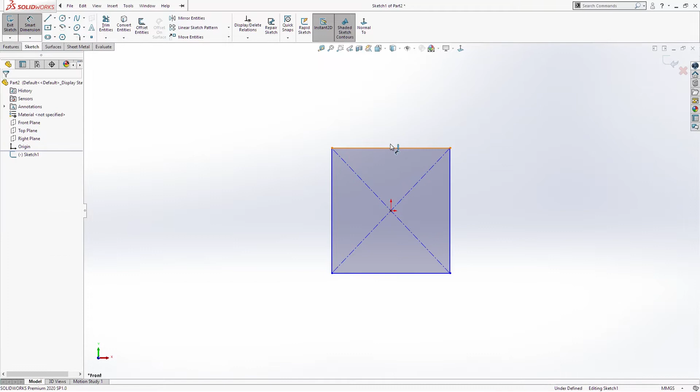Start to sketch on front plane. We will draw one center rectangle. We'll add a few dimensions. We'll go in extrude boss base, 5 millimeters, and we'll click OK.

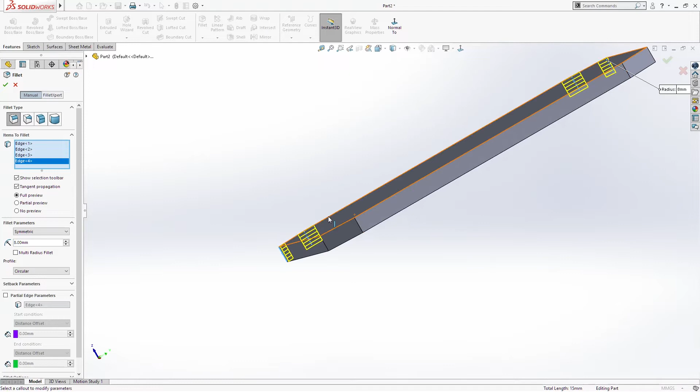Next thing that we are going to do is add some chamfer, 10 millimeters, 45-degree. We'll click OK, and fillet radius 8 millimeter. And click OK.

We'll go in chamfer one more time, 2 millimeters. Okay.

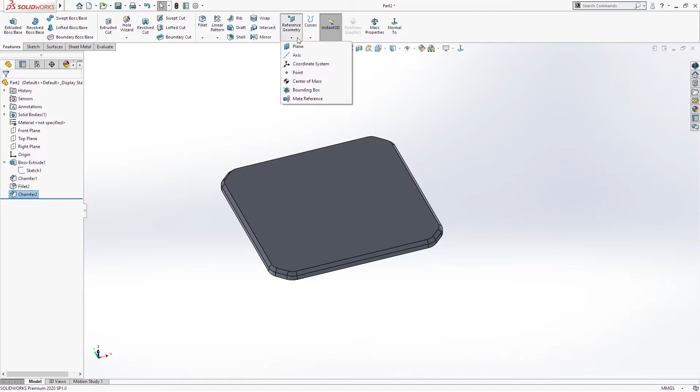Now we are going in reference geometry plane. First geometry will be right plane, and we'll add one dimension, 37 millimeters between these two planes. Click OK.

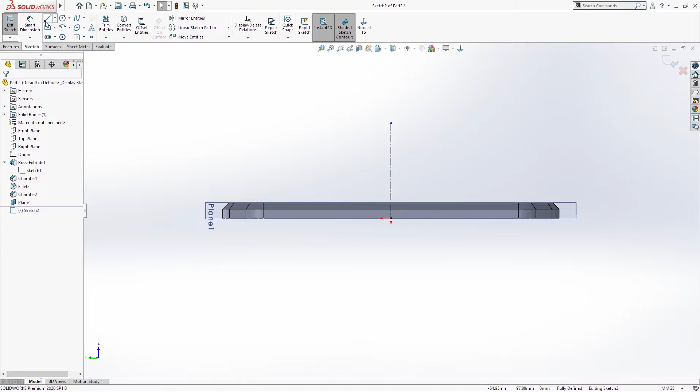Sketch on this plane. We'll create one center line. Then we need a few lines here. Add relation between this point and this line here, coincident, and also these two coincident. We can hide this plane now.

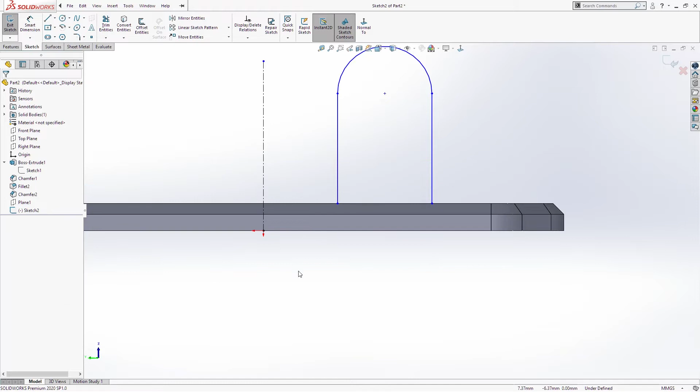We can hide this plane now. We'll continue to sketch. We need one circle now.

This will be 14 millimeters. Here we need 16 radius. We'll create one center line. From here to here we need 30. Then from here to here we need 52.

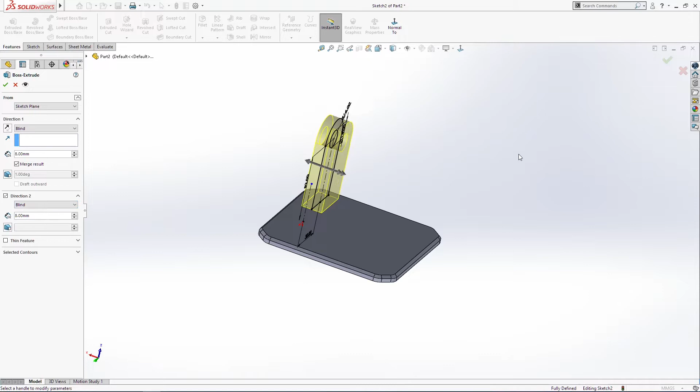We'll finish this open contour, and we'll create one extrude boss, two directions, 8 millimeters. Click OK. Now we'll add fillet, 2 millimeters, and click OK.

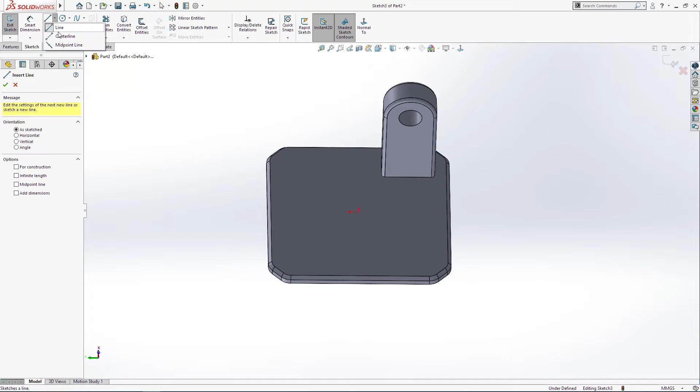Next thing that we need to create is two planes, but we will need first a few reference points. The second will be on this surface here. So create one center line again.

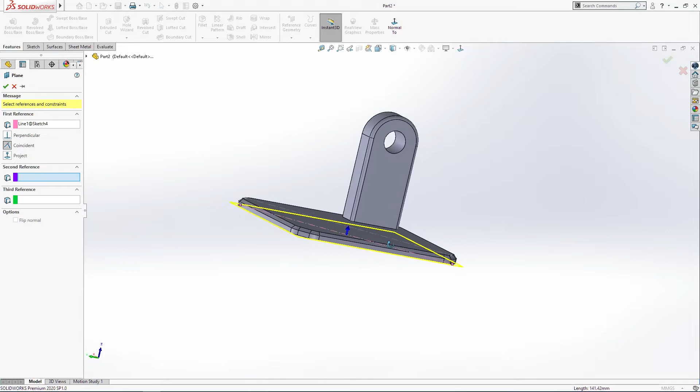Exit. Go in reference geometry, plane. Click this line here and this point here, and click OK. Hide these two.

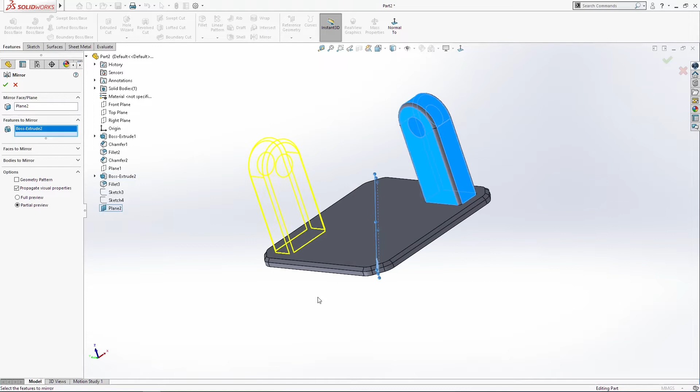Now we're going to use the mirror command. We'll select plane 2 and boss-extrude 2. Click OK. Also don't forget chamfer - in my case fillet. And click OK. Hide this plane.

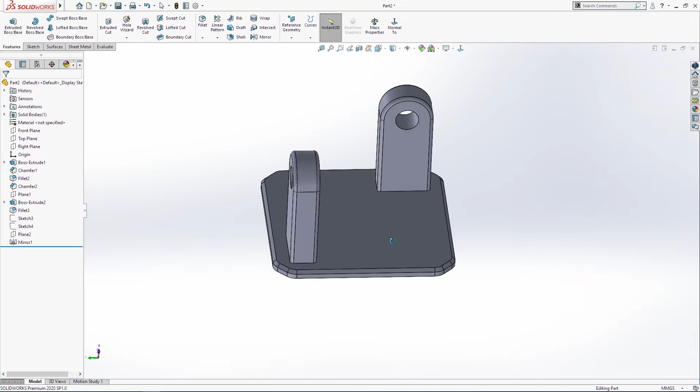Save the document, and we are going to continue to sketch our next part. The next part that we are going to sketch is connectors for the middle part, and we are going to start to sketch on the front plane.

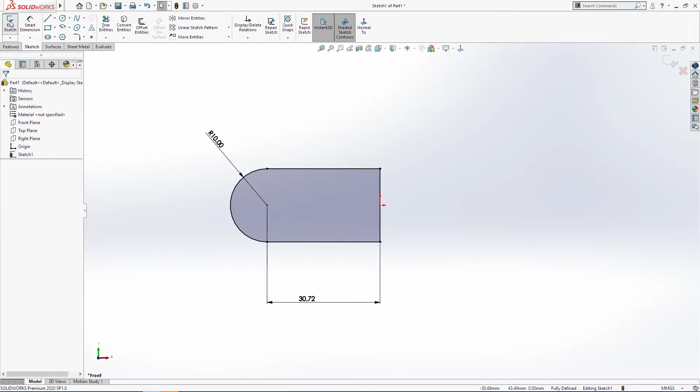Create a few lines first. Make this line and origin point midpoint, 10 millimeter, and from here to here we need 30.72 millimeters. This will be 7 diameter.

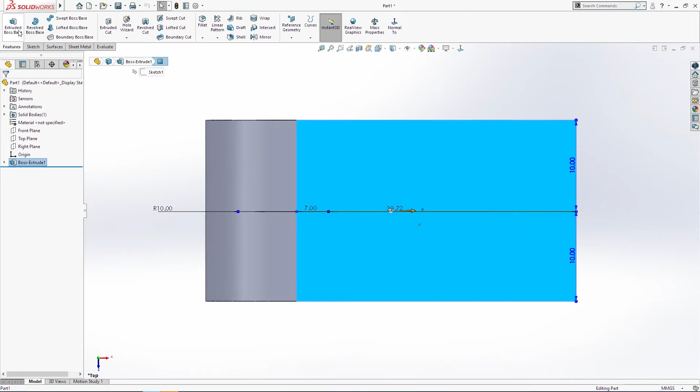Extruded boss base, two directions, 10 millimeter, and click OK. Now we are going to sketch on this face here. Create one rectangle. We need one center line.

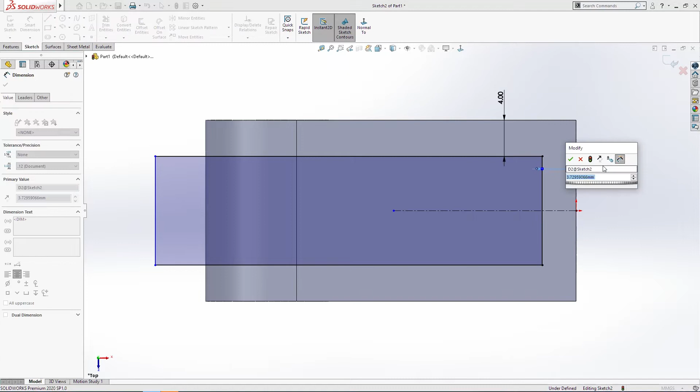Make this three lines symmetric. Add a few dimensions, 4, 4. Extrude cut, through all, and OK.

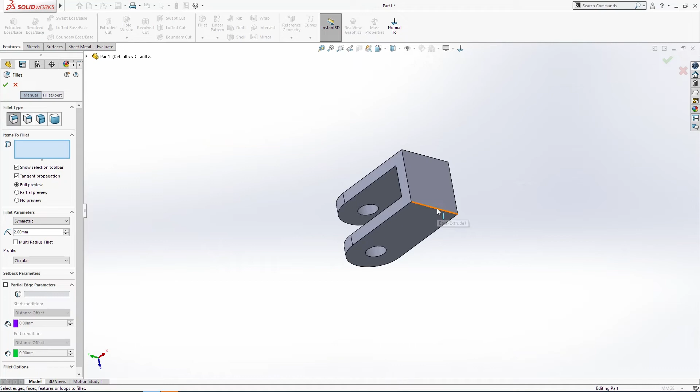Now we are going to add some fillets, 2 millimeters, for these two edges. One more time, 1 millimeter, for the other edges, or 0.5. Click OK.

Edit this fillet and add this edge here and this edge here. Click OK.

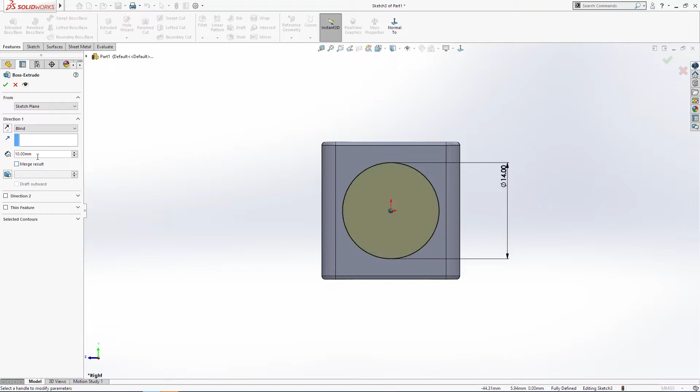Now we are going to sketch on this face here. Create one circle. It will be 14 diameter. Extrude boss, 20. Click OK.

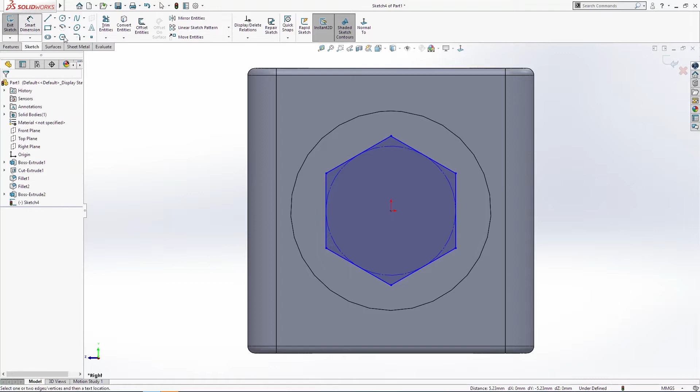One more time, sketch here. Make one polygon. These two have to be vertical. 5. Extrude boss, 15 millimeters. Click OK.

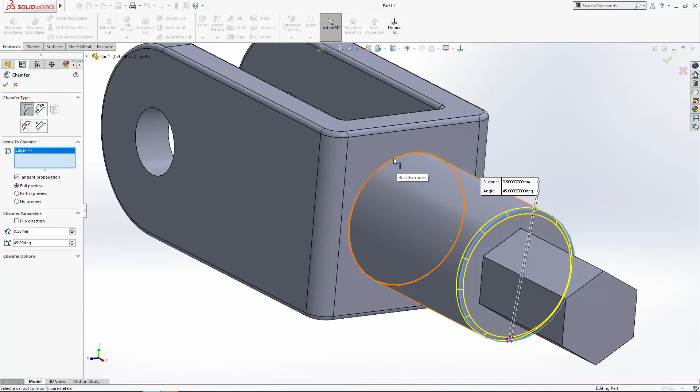Chamfer, 0.5, this edge here and this edge here. Click OK.

So the next part that we are going to sketch is our third part for this video. So create new part. We are going to sketch on front plane.

If you see, I changed the commands that I am usually using, but it will be easy for you to find them on the normal menu. So this is the best way for me because I'm using shortcuts and other things.

Start new sketch on front plane. Sketch two center lines. Make these two coincident, and also this line for construction.

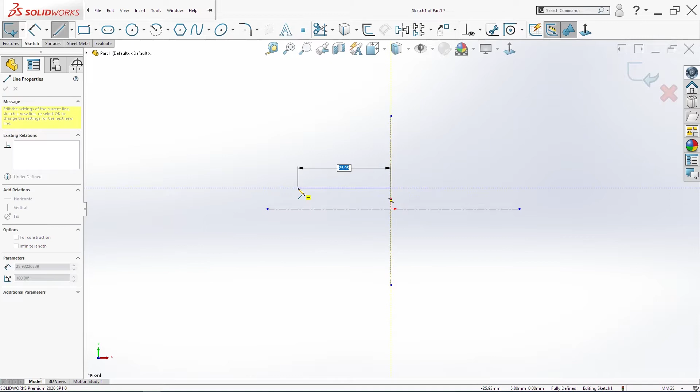We'll add a few more lines and arcs. So now we need one arc, one more arc. Make this to midpoint, this to concentric. Here we miss tangent, and add a few dimensions.

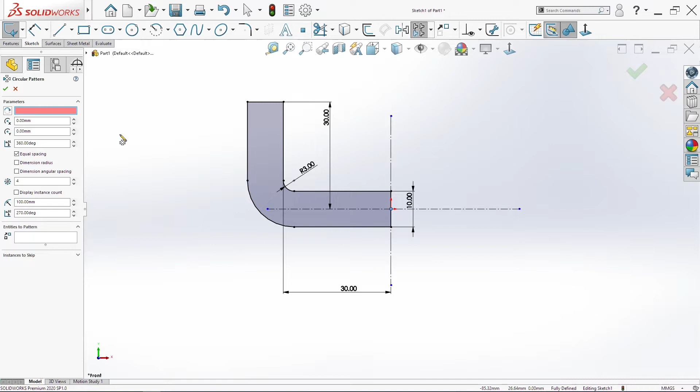Also from here to here, 30. We will use now circular sketch pattern. We select this point for reverse direction, and we will select the other lines that we need for this circular pattern.

We don't need this line here. We'll make 2, click OK. I will add a few more dimensions, and I will use trim for this here and exit the sketch.

Now I'm going to use feature boss base, select this sketch region, two direction, 10 millimeters, click OK.

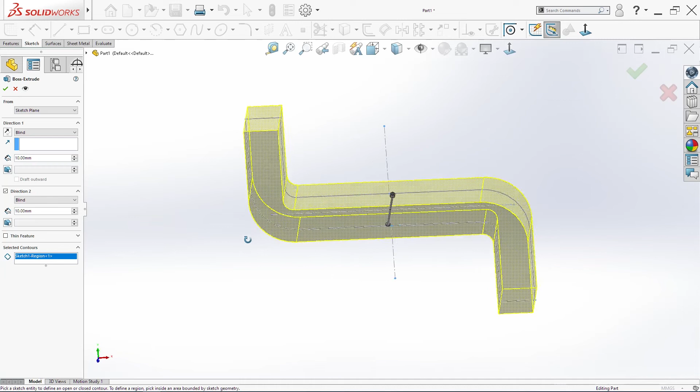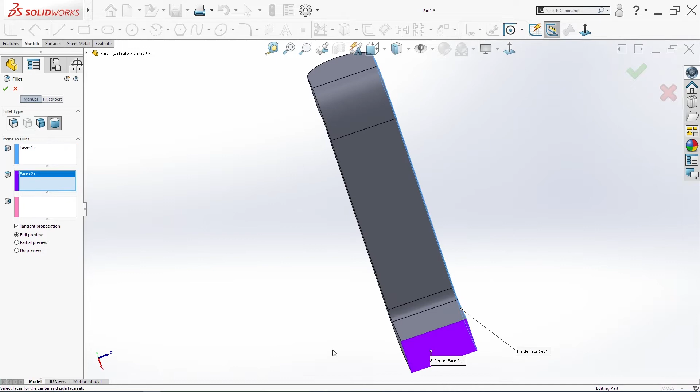Next thing that we are going to do is to add some fillets. Use full round fillet. Select this surface, and this surface. Make the same thing for the other side. This surface, this surface, this surface.

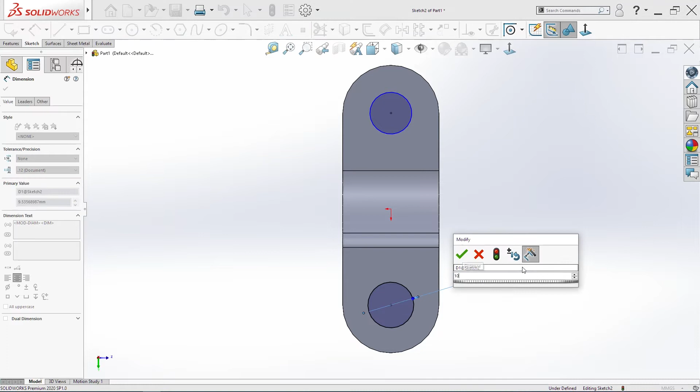Start to sketch on this surface here. We'll make 2 circles, the second one will be here. Add 1 dimension, 10 millimeters, and these 2 has to be equal. I'm going to extrude cut through all. Click OK.

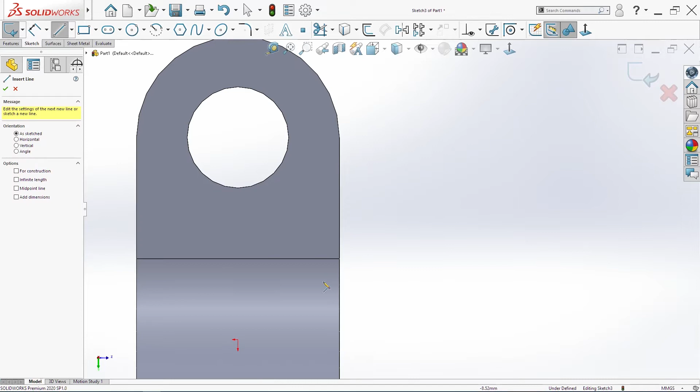Now we have to sketch on this surface here. So again, line, arc, one more time arc, and we need 1 center line, again 1 more line. Make these 2 coincident. Use trim for this here and add a few dimensions.

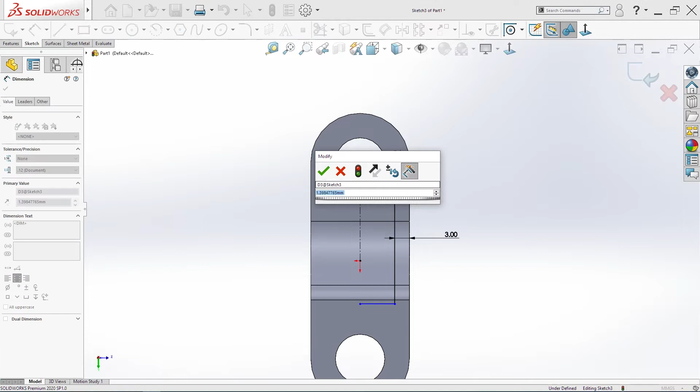So from here to here, 3 millimeters. Make this circle and this here concentric and add 1 dimension here, 1 radius, and from here to here we need 3 millimeters. This will stay blue, and select this 3 and go in mirror. Now go in extrude cut, write 7 millimeters and just click OK.

Again, now sketch on this surface here. We'll use a few lines. Make these 2 collinear, and we need just 1 more dimension from here to here, 3.5, and we will use extrude cut command, and we will make it up to surface. Select this surface here and click OK.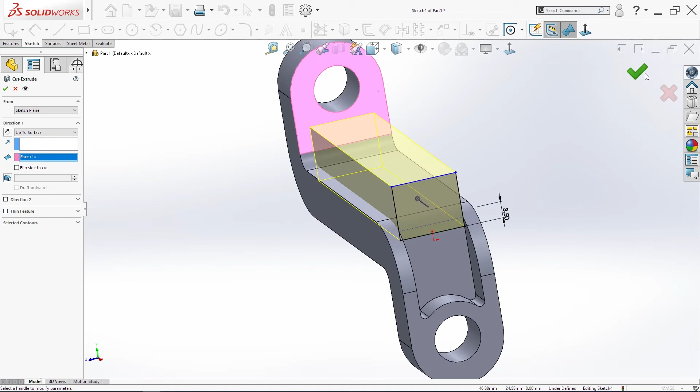That's the one side. So we can measure here 3.5, and here we need 7.

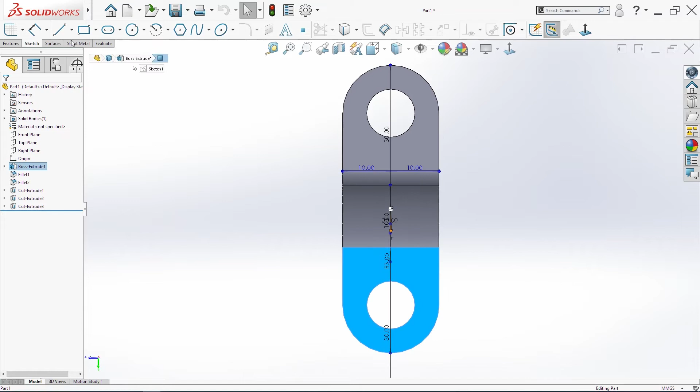Now we'll sketch on this surface here. And also the same things that we just did. 1 center line, make it for construction, line for, so from here to here to here. Now 1 radius, smaller radius, then 1 bigger, and we'll make these 2 concentric, this point and this line here coincident.

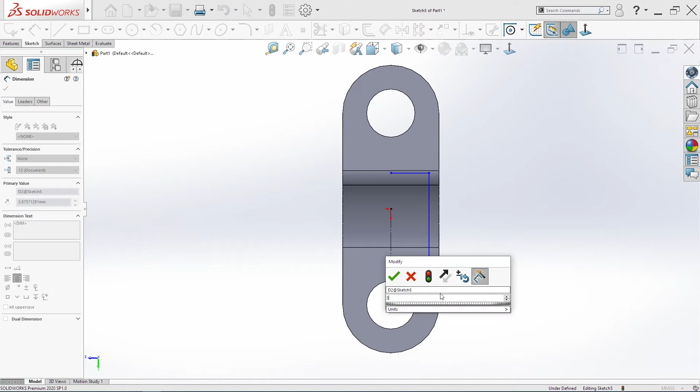We'll add a few dimensions, R1, 3 millimeters. I don't need that, so from here to here 3 millimeters, and these 2 coincident, and drag this a little bit, select everything and go in mirror. Extrude cut 7 millimeters, click OK.

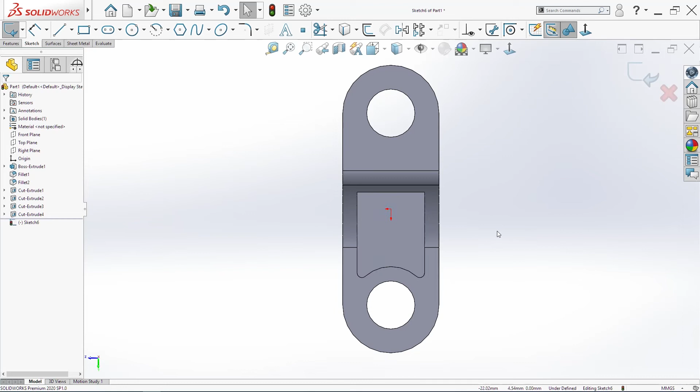Sketch on this surface here. Again, make one rectangle. Make these two collinear, add one dimension from here to here, 3.5 millimeters. Extrude cut, go up to surface, select this surface here, this face, and click OK.

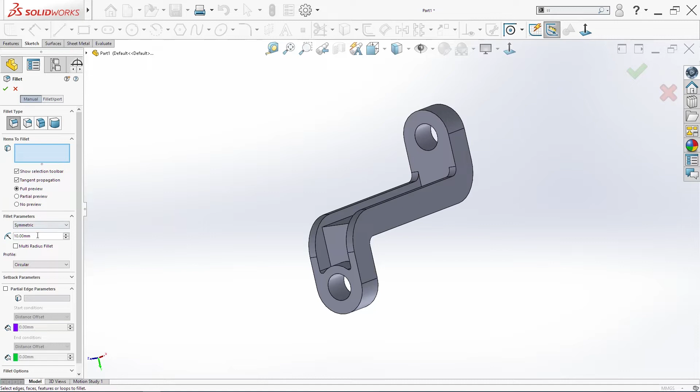Now we'll use command fillet, we're going to constant size fillet. We need 6 millimeters. We'll select this here edge and this here edge and click OK.

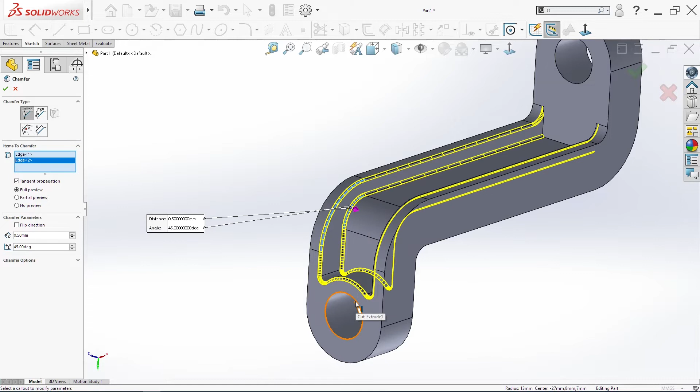We need chamfer now, 0.5 millimeters, and select this here, this here, this here, these edges here, also the circle, second side, and circle, and just click OK.

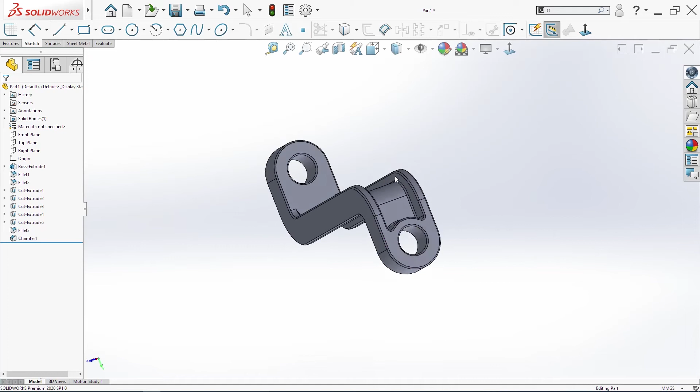Save the document, and we are going to sketch the next part. Create new part. So we will sketch the third part now on front plane.

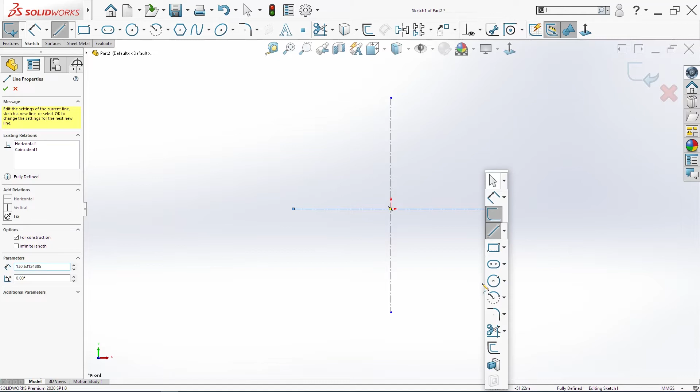I'm calling this command by clicking S on my keyboard. I will start to sketch two center lines, lines for construction, 1 and second. Now I need a few lines.

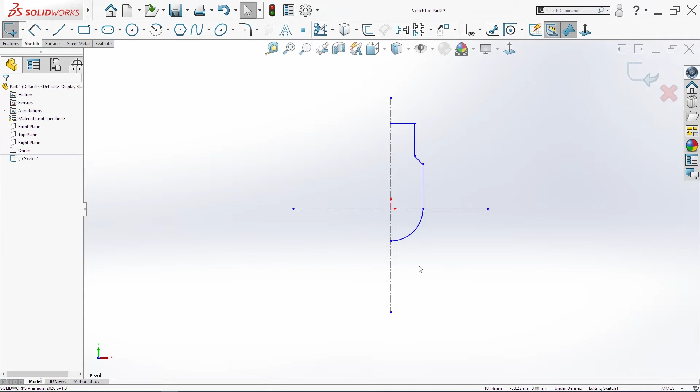Add these 2 points coincident. Add a few dimensions. 7. Here we need 45. And here we need 28. And here we need 12.

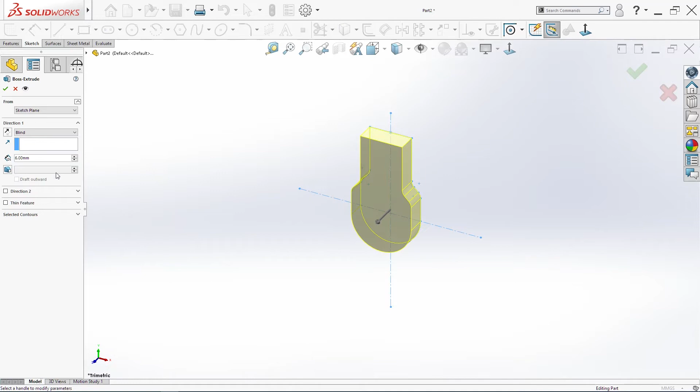I will add some fillets, 2.5 here and here, click OK. Select this all and go in mirror. Exit the sketch, go in feature boss base, two direction, 6 millimeters, and click OK.

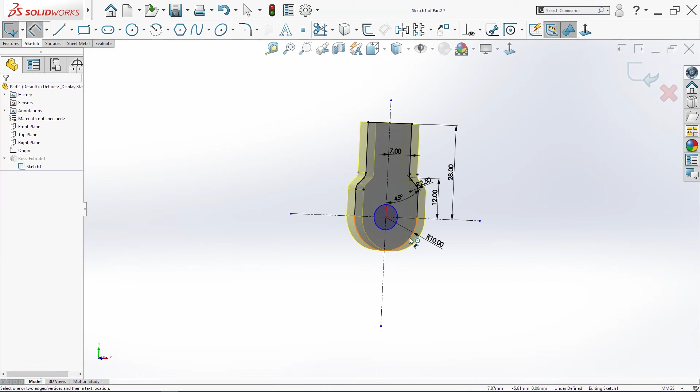We forgot one thing, I will sketch it now. I need one circle here, it has to be 7 millimeters diameter. Exit the sketch. I will add some fillets, 2 millimeters, here and here.

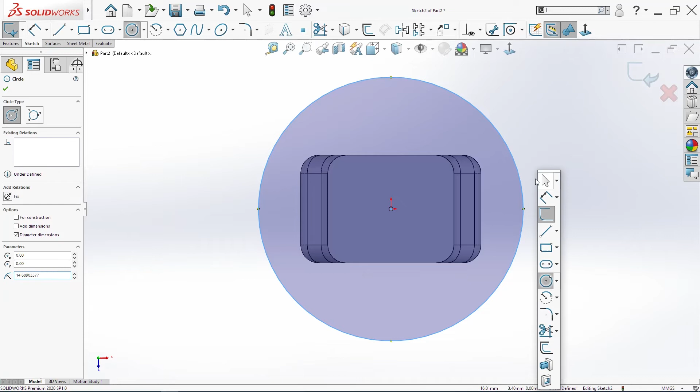And I will start a new sketch on this surface. I will make one circle, 20 millimeters, and exit the sketch. Feature boss base, 2 millimeters.

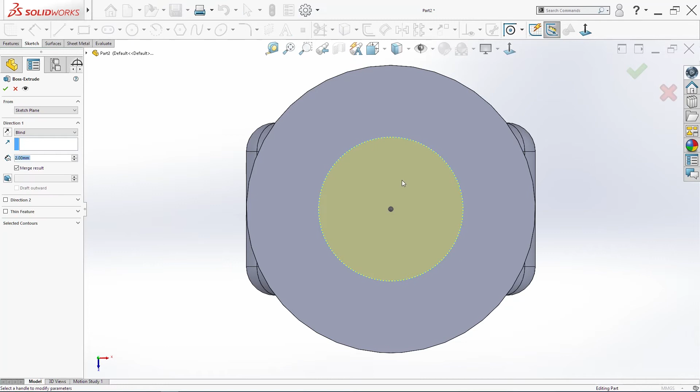Sketch on this surface one more time. I will need one more time circle, it will be 10. Exit the sketch. Go in feature boss base, 10 millimeters. Just check the direction and click OK.

I will add chamfer 0.2 here. I will add fillet 5 millimeters here. I will add one more time chamfer, 0.5 here. And I will change this chamfer and I will add a few more edges and I will click OK.

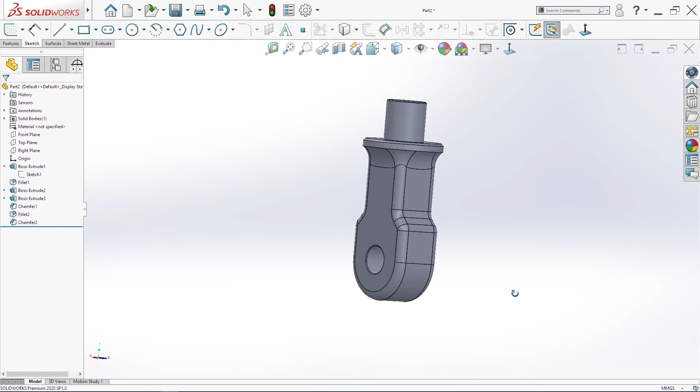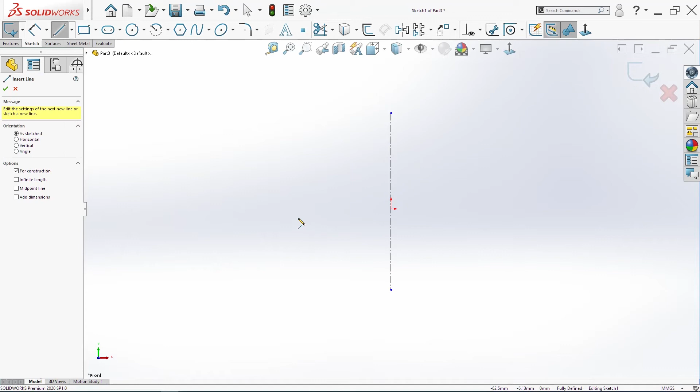Save the part and we are going to sketch the next part now. File, new part. The next part that we're going to sketch is a bolt. Sketch on front plane, center line, a few lines now.

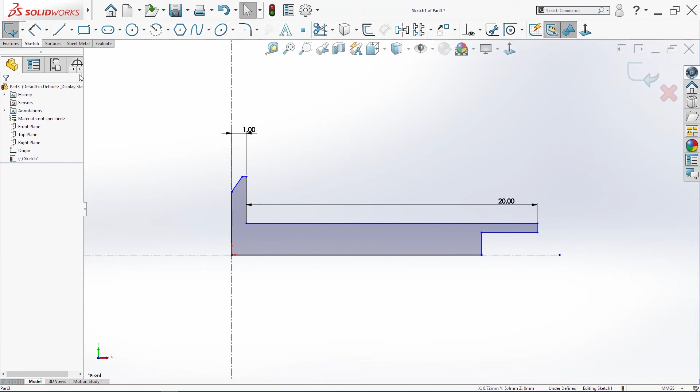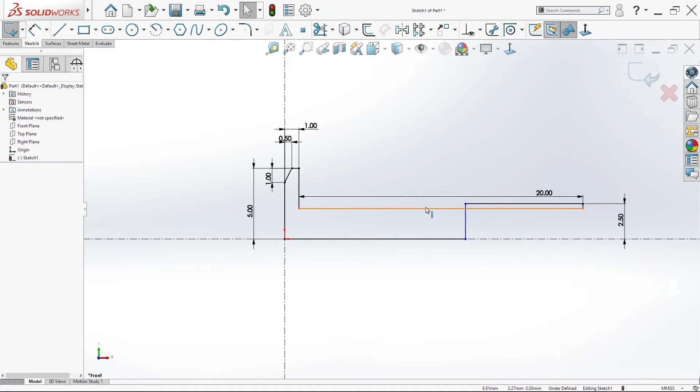I will add some dimensions: 20, 1 millimeter. This has to be 1, and also this side 0.5, and here we need 5. Then from here to here we need 2.5. This here is 3.5.

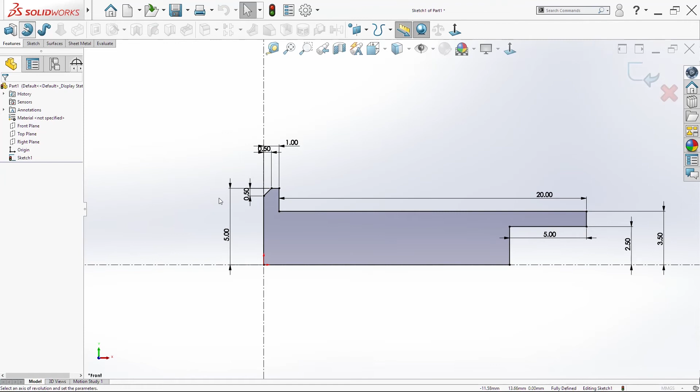Going forward, we'll change this here to 0.5 also. Then Revolved Boss/Base, select this line here and click OK. Save the document and create one more part.

Sketch on the front plane. I will create center lines. Just click, hold the left click and drag the center line, so you don't have to always click the escape button or select and unselect things. Now I will make a few lines and add a few dimensions.

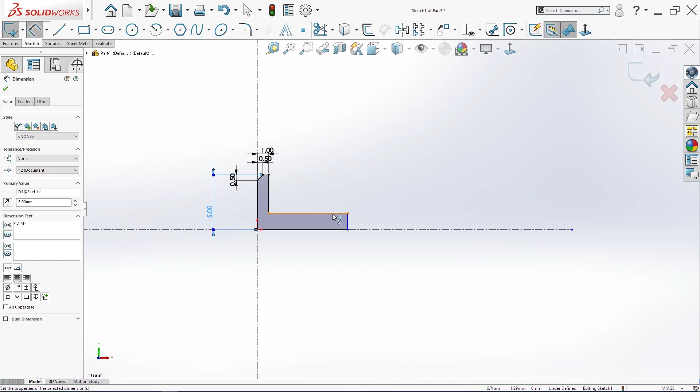0.5, 0.5, 5, 2.5, and from here to here we need 6 millimeters.

Exit the sketch, Revolved Boss/Base, select this axis of revolution and click OK. Save the document. Next thing that we are going to do is make the assembly.

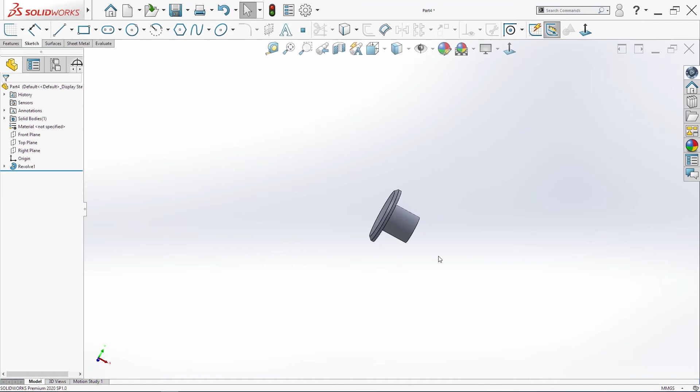Create a new assembly. Go in insert component, browse, select all components that we have designed, click open. First I will add all of them here, and later I will add the mates between the components.

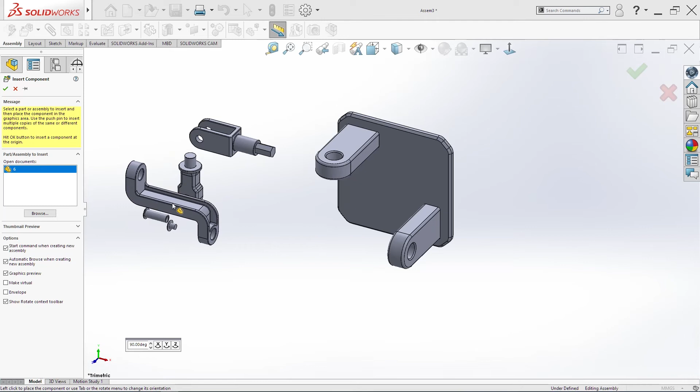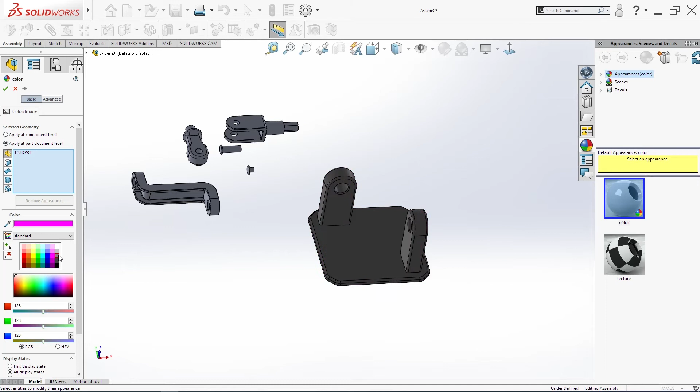Maybe it's good to change the color of our parts. So we will make this here something like this. Also, we can turn on RealView Graphics. We can make this component blue. This here will be orange, maybe.

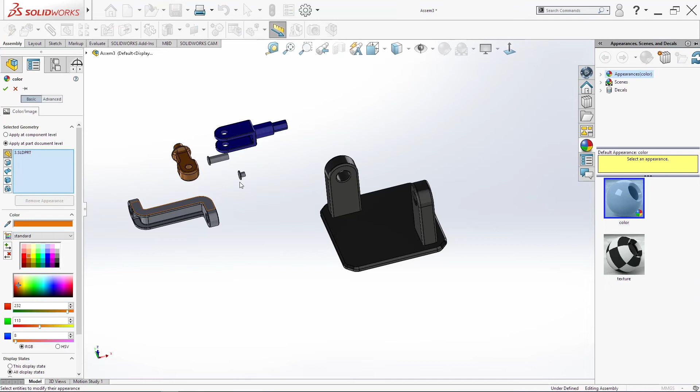I will make this here with this color, and this will be red, and also this here is red. I'm not adding material, just color.

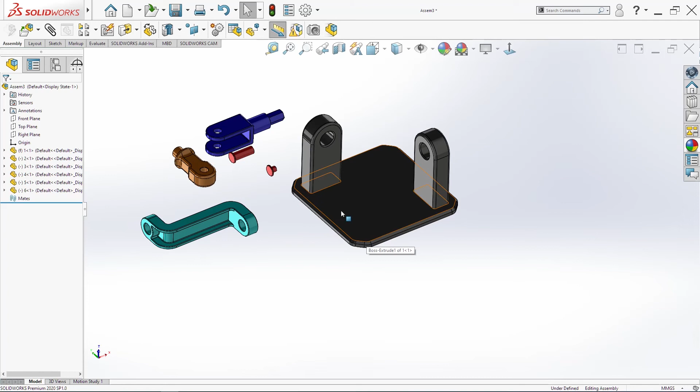Now I will start to make mates between all components. This is our fixed part. If you want to make it floating, make it float, but I want it to be fixed because this is like a housing or something like that. First, I will make a mate between these two surfaces here.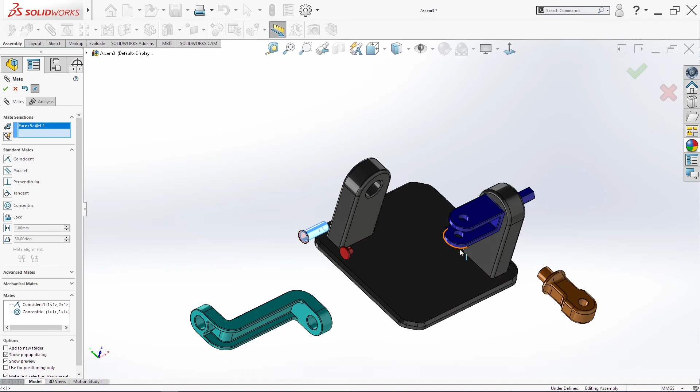Then these two circles. Now I will add a mate between these two circles or holes, this surface and this surface here coincident, and this circle and this here will be concentric.

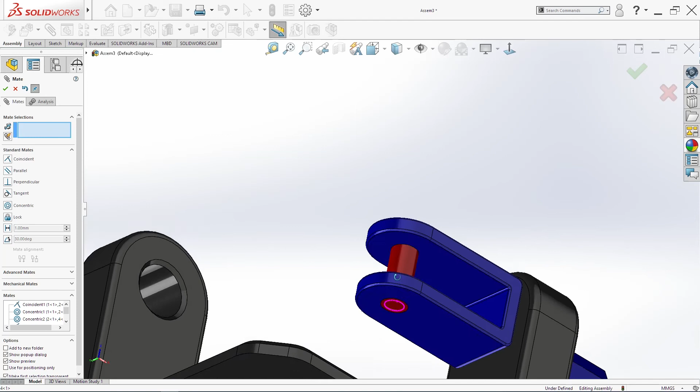And one more thing: drag this, select then these two surfaces and click OK. Then I will add one mate between these two cylinders here, concentric, OK, and these two surfaces.

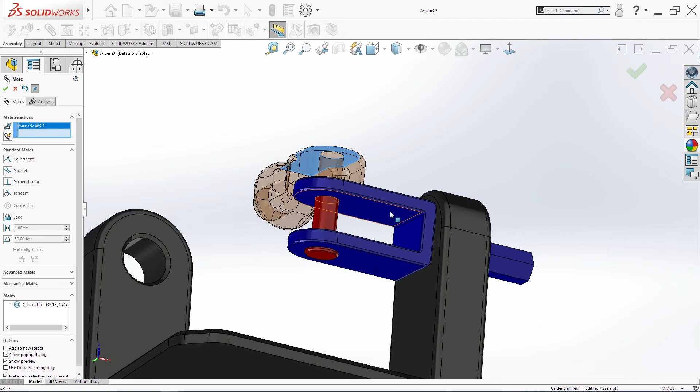I will go in top view. Okay, we can rotate these things. Then I can add one more relation between these two here. Click OK, and also make these two concentric.

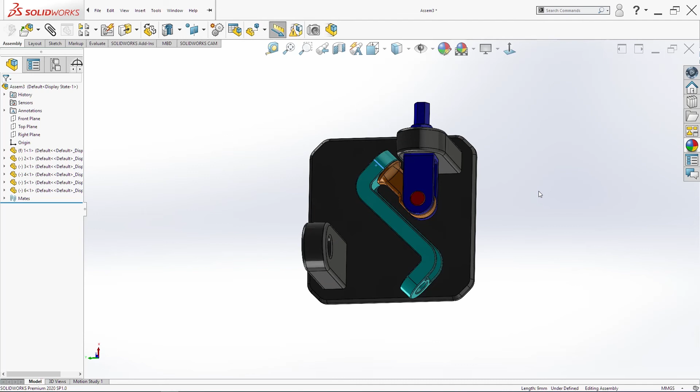The next thing that I want to add is more components, so practically I have to copy these 3 components, 4. I will hold Control and drag on the right side or left side.

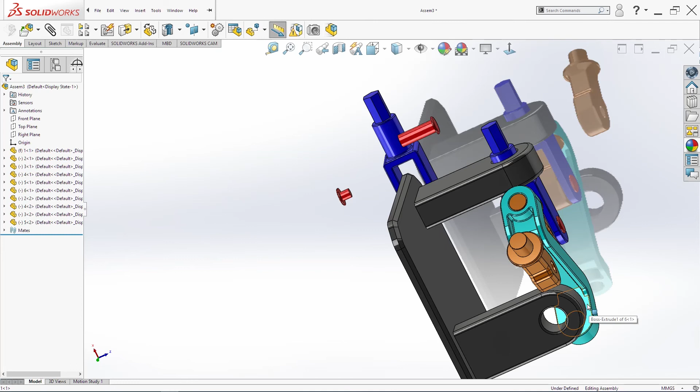The first thing that we have to do is mate this here and this here. So select surface, this here and this here. Make sure to change direction, flip the mate alignment, and make these two cylinders concentric. Click OK.

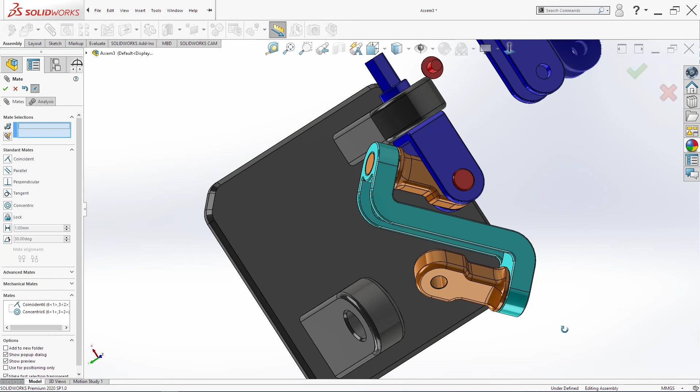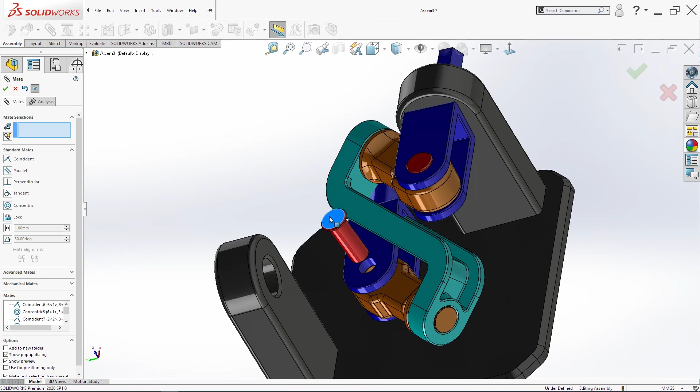Then we need to mate this surface here with this here, and also this here with this here. Also add our bolt. Click OK.

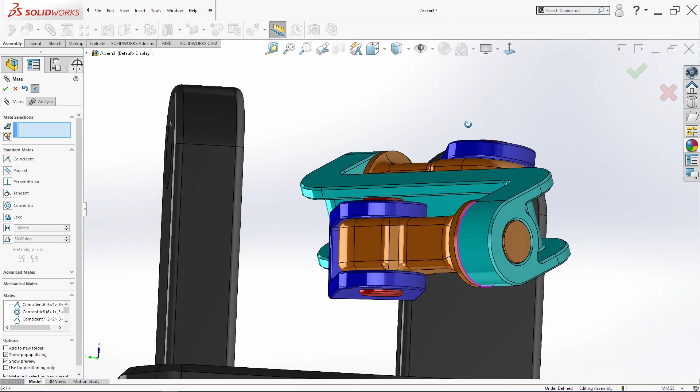Top view. Rotate all mates a little bit, and add the last relation between these cylinders.

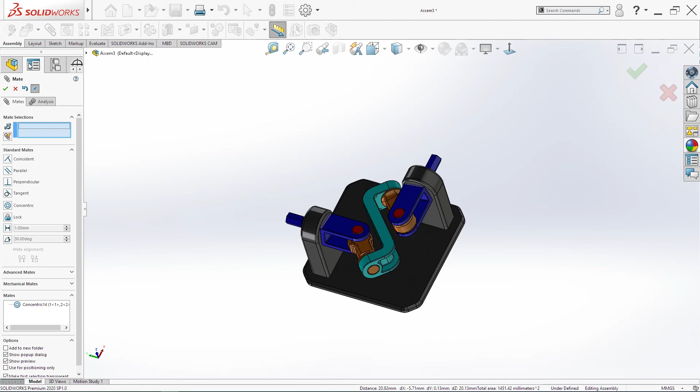So I will move these things a little bit. It's hard to adjust the things. I will move them again, so these two. Okay, now it's working. It's hard to adjust them for the first time, but you can try a few times and everything will be fine. So now I see everything is working fine.

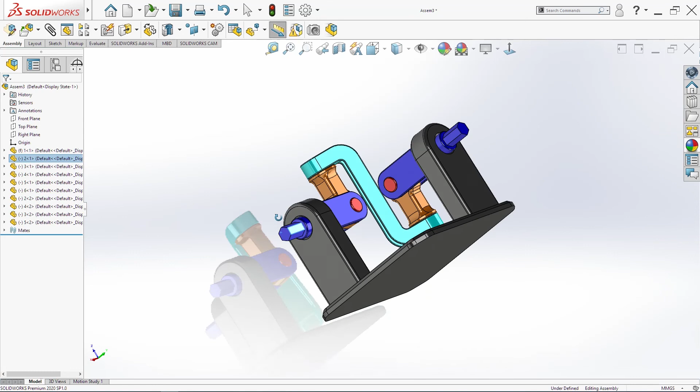Everything is okay. I will now make one motion study. First, save the assembly.

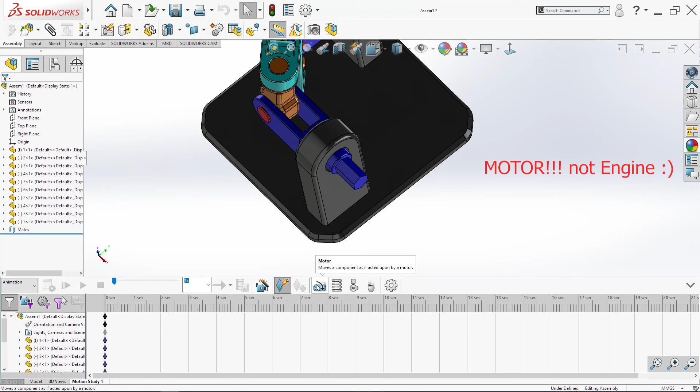So for the motion study, go in motion study, then we'll add a motor. Select this here, this face. Add 15 RPM, constant. Click OK. Make it 10 seconds and play.